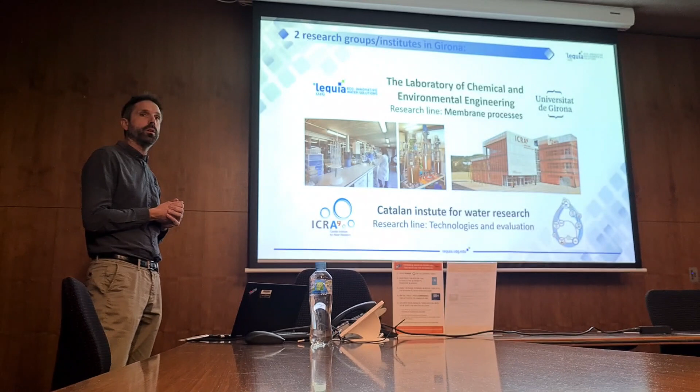Apart from this reason of water scarcity, Girona in Spain is one of the hubs for water research, let's say. I am currently working at LEQUIA, which is a research group of the University of Girona, and we are working closely with ICRA, the Catalan Institute for Water Research. These two research groups are quite strong, at least at the European level, and quite strong with regard to the size of the city, which is only 100,000 inhabitants, and we have a strong activity on water research.

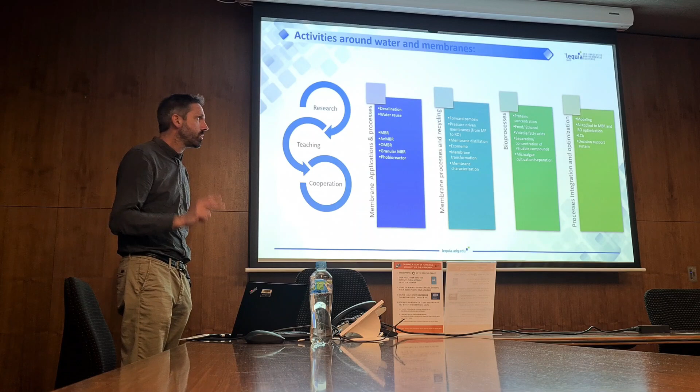And also, finally, we're working on integration, optimization of processes through artificial intelligence modeling, LCA, decision support systems. So more like a global approach.

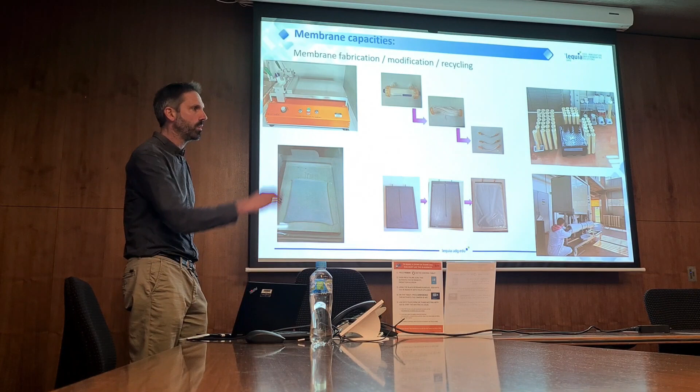In the lab, well, just very quickly, we start to have now possibilities for membrane fabrication, even if it's very basic, especially compared to what Ludo or you can do here at UTS. And we do membrane module modification to try to adapt commercial modules to our needs.

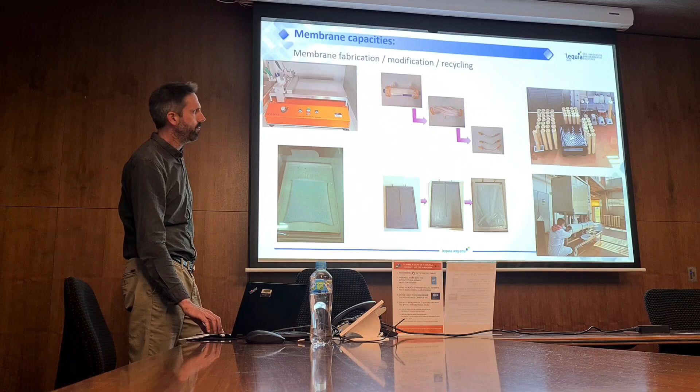And this is part of the equipment that Raquel has, for example, the spinner, for characterization of full-scale modules and cleaning as well. So we have all kinds, from small scale to, say, middle scale, close to industrial scale pilots. And we have the same for RO, so we can analyze from coupons, small modules to big ones.

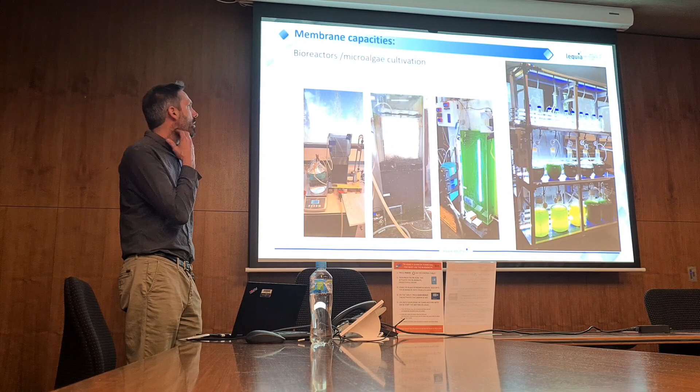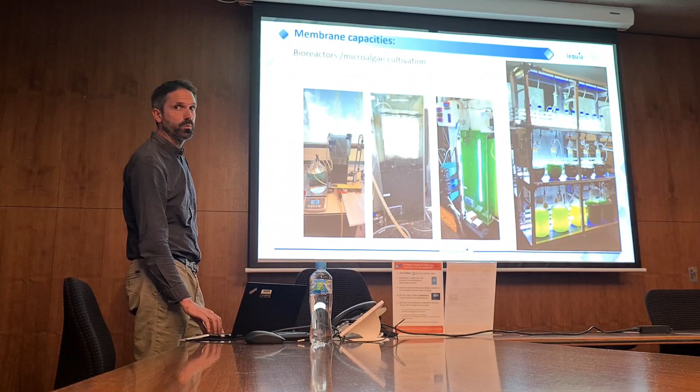And also now we're trying to work more and more on bioreactors, fermenters, microalgae cultivation, so we start to develop also this part of biological processes. This I wanted to mention because it's not a lot of money, but still it's quite a bit of time that we spend on that, and we like it a lot.

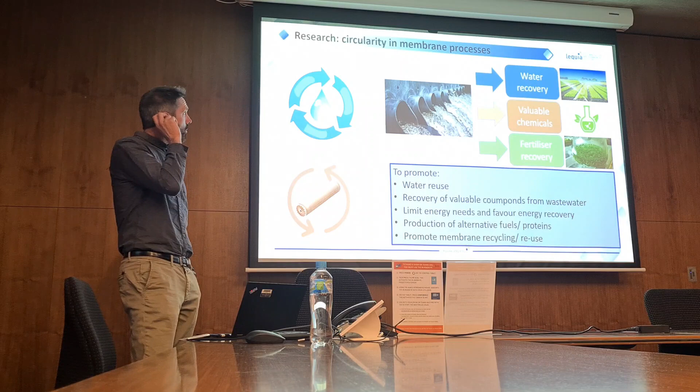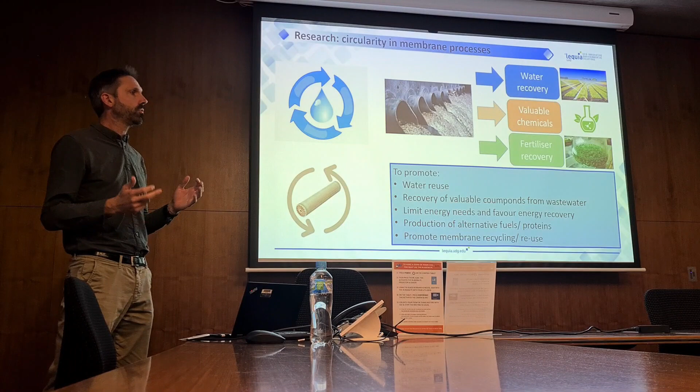And yeah, circularity, going on to the research part. So when we talk about circularity in membrane processes, we're not only thinking of wastewater treatment, but water recovery, trying to recover valuable minerals, which could be fertilizer, for example, as well.

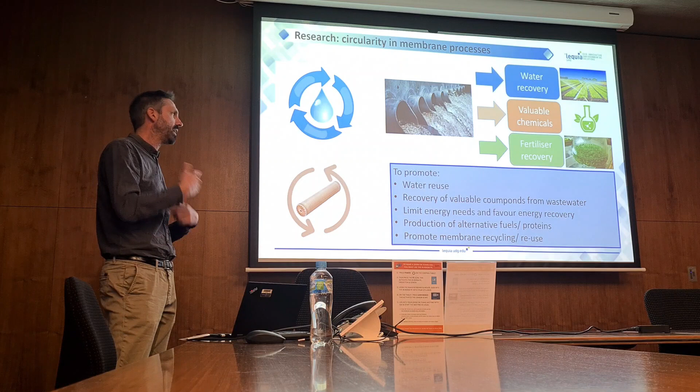So we try to work on projects which are promoting water reuse, recovery of valuable compounds, trying to limit energy needs for those processes, or even to produce energy, production of alternative fuels, proteins, and also through some projects, we have tried to promote membrane circularity, so the recycling or reuse of membranes. So there are several projects that I will go through now during my presentation that I'm involved in.

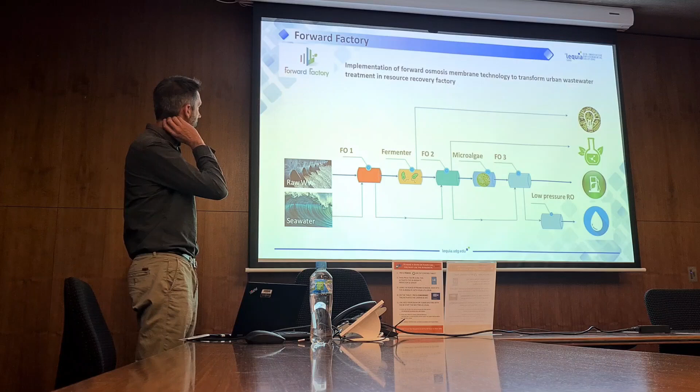So far we're dealing with different aspects of that. The first one is actually my main research grant, which is called Forward Factory. So working with forward osmosis, which is still my main activity. So to try to make use of the osmotic power from the seawater to extract the maximum of water from the wastewater, at low pressure, to have a diluted seawater that you can reuse for whatever water usage, depending on the legal aspect.

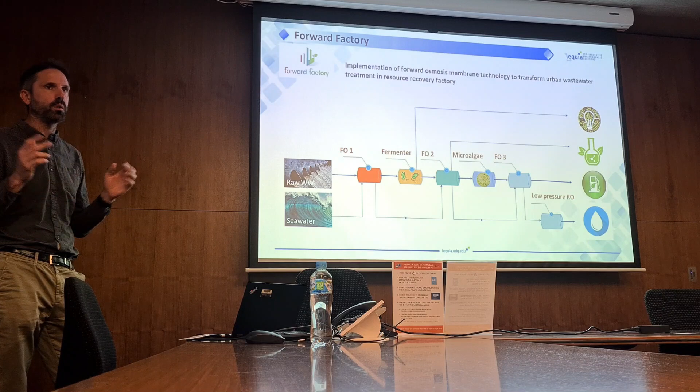And at the same time to concentrate wastewater, because one of the limitations of valorizing wastewater is the high dilution in water of all the valuable compounds. So trying to harvest the water, concentrate the streams, and then to have more potential for valorizing those compounds, to treat them especially through biological processes.

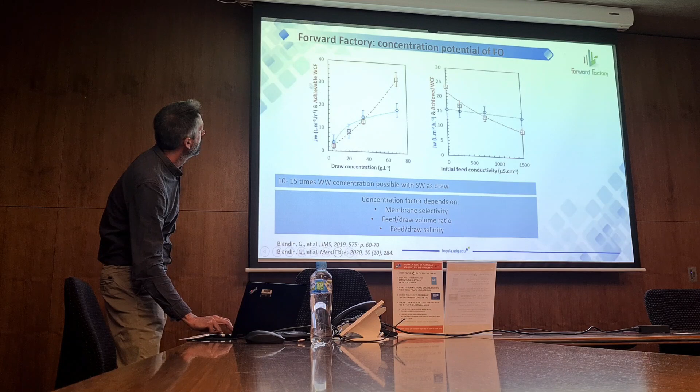There are many aspects that we are dealing with in this project, but one of the questions was, how much can we concentrate? So we're still working on that, trying to refine the model. But basically, if you think of using seawater at 30 grams per liter, you can easily achieve like 10, 15 times concentration. Then it depends, of course, on the salinity of the feed water, of the wastewater, on the arrangement and so on of the forward osmosis system, but just to give a rough number. So there is quite some potential to extract a fair amount of water from wastewater thanks to the seawater.

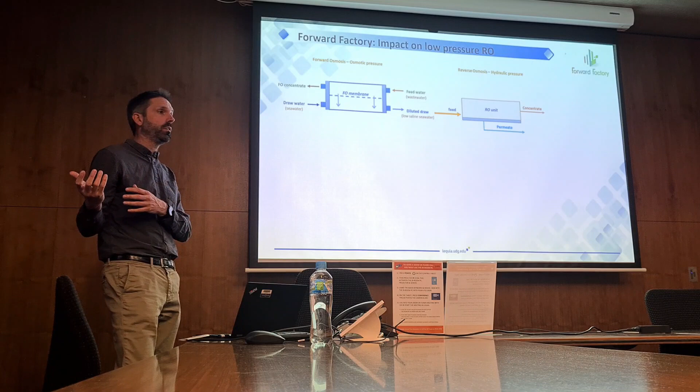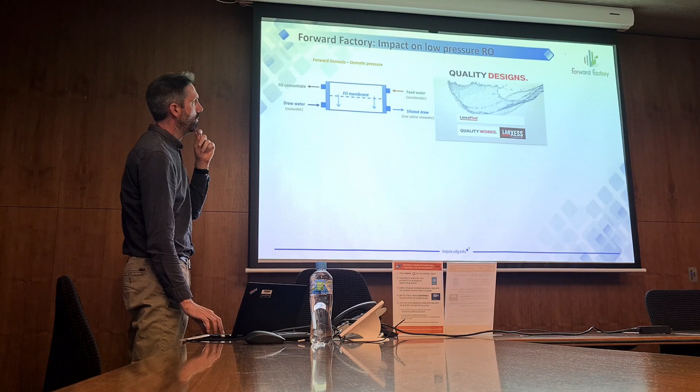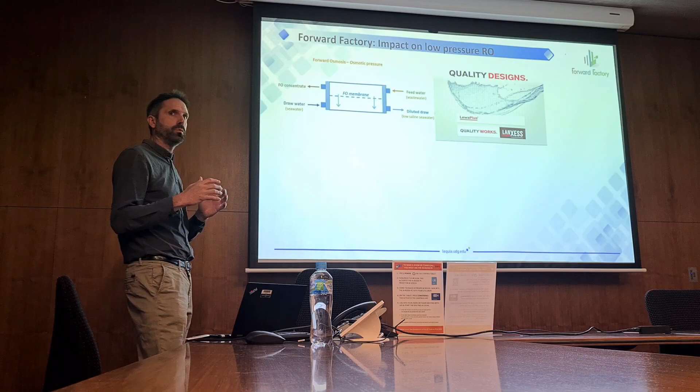And another question we had is, okay, what if we dilute seawater? What will be the benefit in terms of energy and water quality from the permeate of the reverse osmosis? So I have a PhD student who started working on that; she compared different design systems from membrane manufacturers to try to have some idea of what could be realistic in terms of achievable objectives. And what would be the interest of diluting? If it really makes sense, and until when can we go, basically?

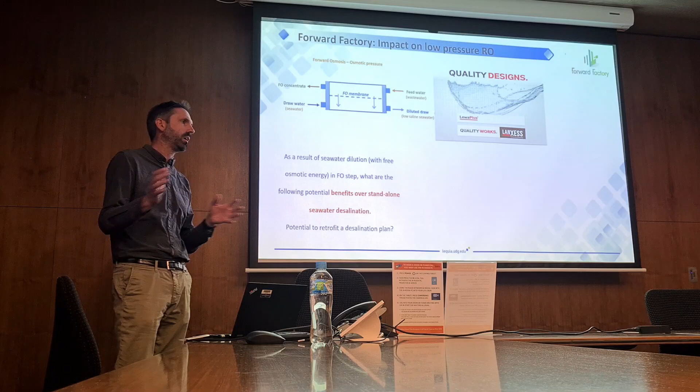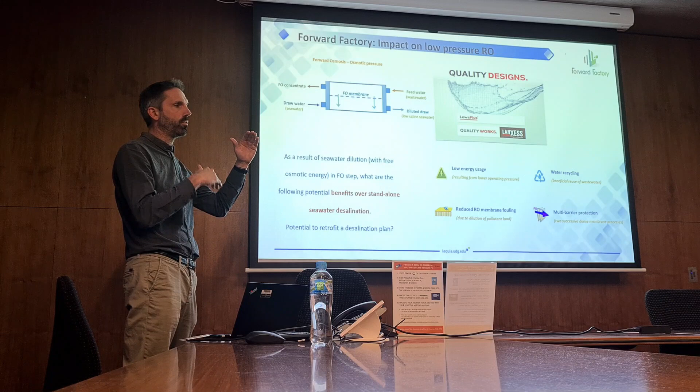And one of the questions we had is, if we already have a desalination plant operating, is it possible to dilute the stream? Will the desal plant still be functional, or is it nonsense and we better start with a new desal plant? That kind of question we try to solve. In theory, this is the main interest you can have: low energy usage because you dilute with wastewater, you have your water recycling, you have reduced RO fouling, and also multi-barrier protection from the wastewater because you have FO and RO membranes, so a double dense barrier, to have a very high rejection of all organic microcontaminants.

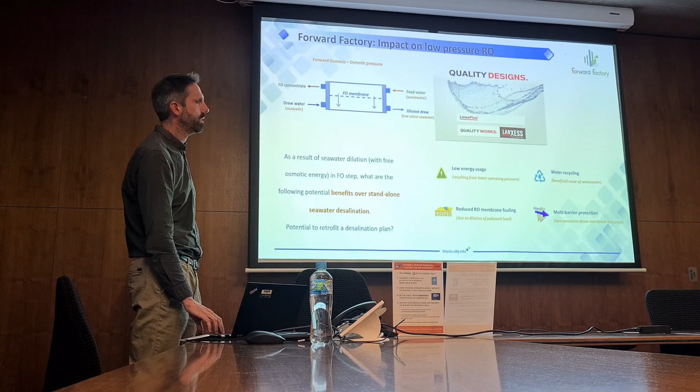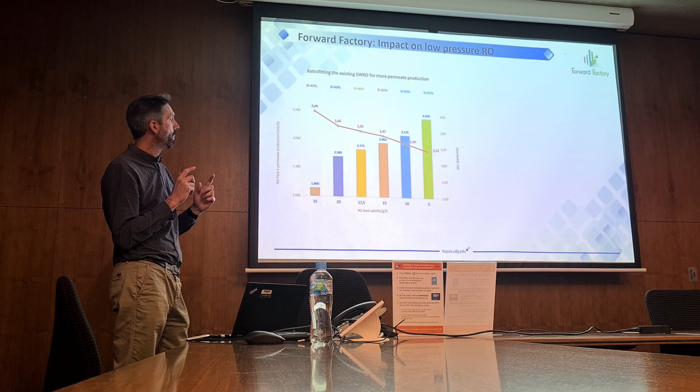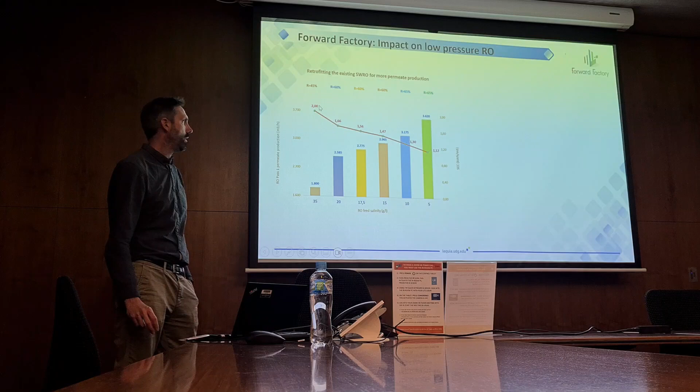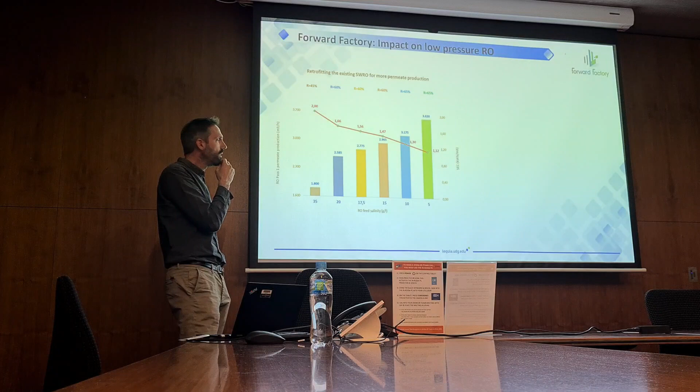So, well, she did a lot of calculations, but this is one to try to sum up. So we started with a design of a typical desal plant where you can produce 1,800 cubic meters per day of permeate. And if we have 45% recovery using seawater as feed, it will consume around 2 kilowatt-hours per cubic meter to produce water. This is what comes from the software. If you look at all the software, they come to the same results as soon as you have an energy recovery device, depending a bit on the design you choose. But that was our starting point. And then we started to check the impact of dilution.

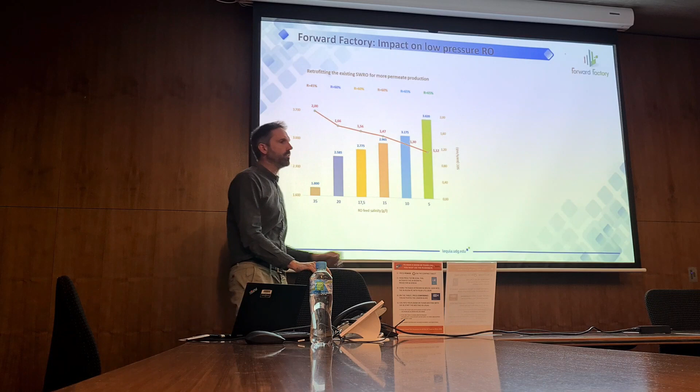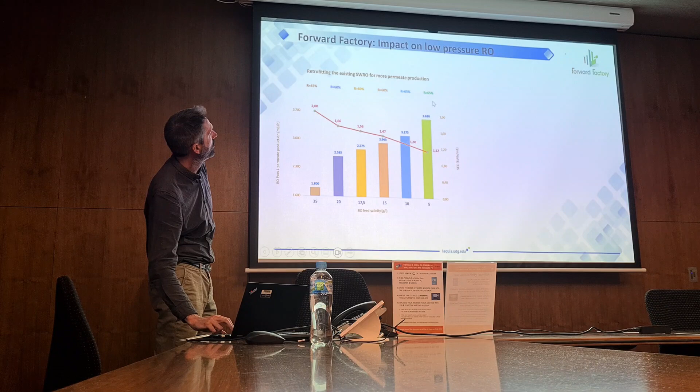So if we dilute, what happens? What are the potentials? So here, for example, you can increase the recovery of the unit, up to 60%. These values basically are when we reach the alarms in the system. So the design software was starting to tell us that this is going to be an alarm because there is too much permeate, there is too low concentrate, that kind of alarms.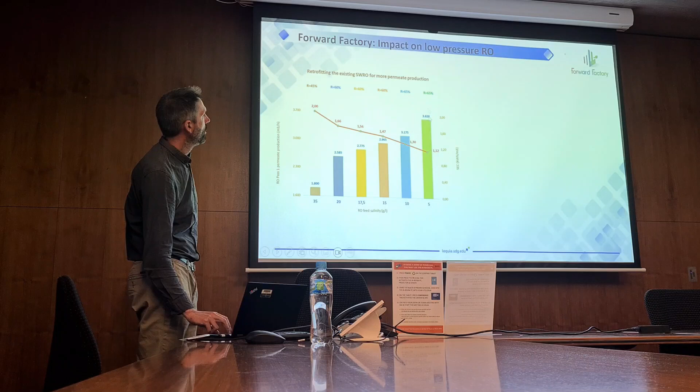So what we saw is that 5 grams per liter is very ambitious, but in this case you can, for example, increase the recovery to 65%, produce 2 times more water than the initial state, and have an energy consumption which is more or less half of what would be a desalination. So some potential here to produce more water, to reduce energy, thanks to this system.

What we saw also is that there could be an interest in boron rejection, well, to reach lower boron limit. That is actually a problem in the desal plant, that they normally put a second pass sometimes because they cannot reach the boron limits, which increases a lot the energy requirements. Also, we had relatively low TDS, but still within the specs.

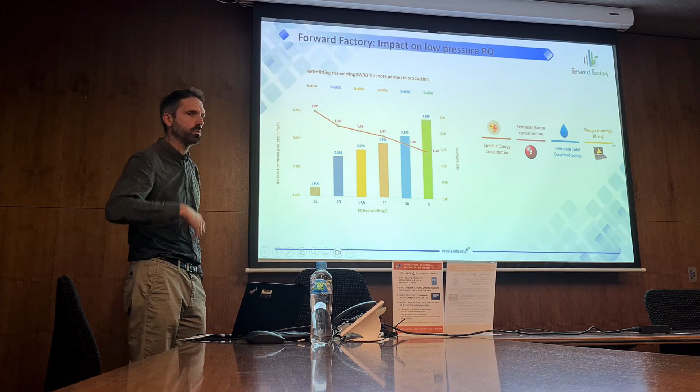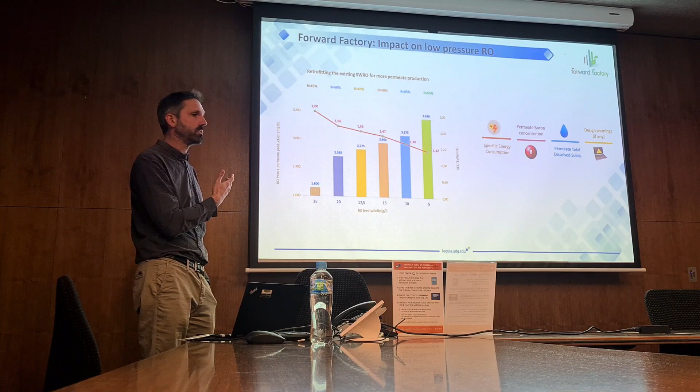So we still want to work and talk to industry to see, well, what the software gave us, is it relevant in terms of industrial design? Because it's important to know if what we show through these softwares is really relevant at full-scale design of the plant.

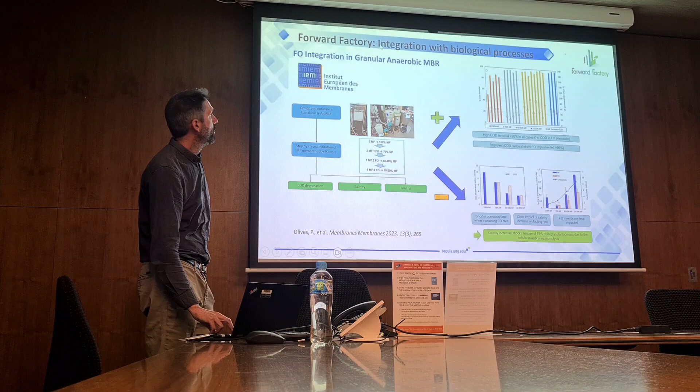Another approach that we went through in the forward factory project is how we could integrate forward osmosis with biological processes. So it's just an example that in this case we worked with IEM from Montpellier, where they had a project on the granular anaerobic membrane bioreactor. If we can couple the system with forward osmosis, what would be the benefits, limitations of the system?

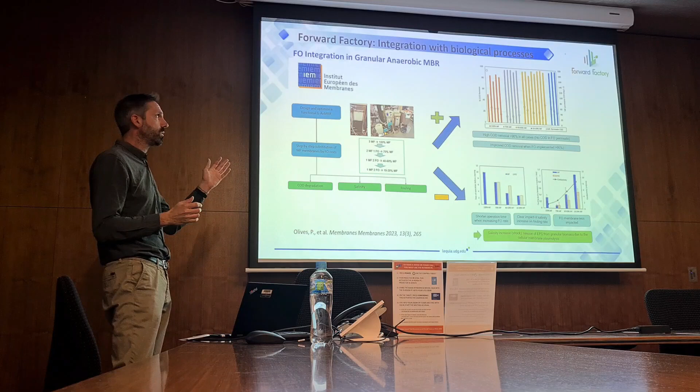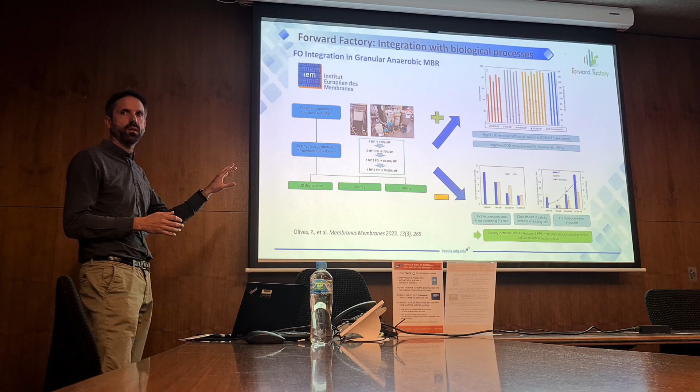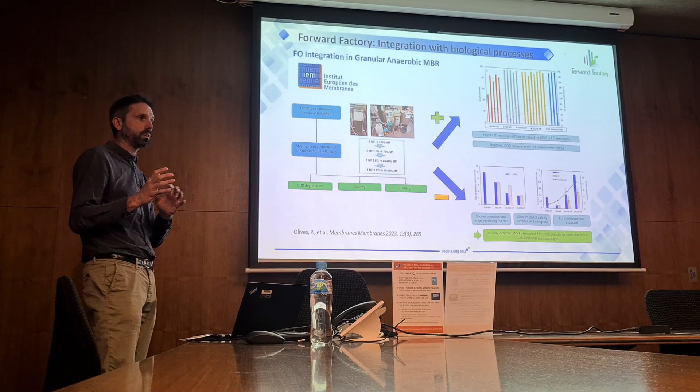So here we saw that we could increase the COD removal above 90% when we implemented some micromembrane system. We have some limitation of salinity increase, so probably it's not the best design, but we are working around different concepts to have a clear idea of how it would be most relevant to integrate FO concentration, or even compare with other membrane technology to see if it would make sense, basically.

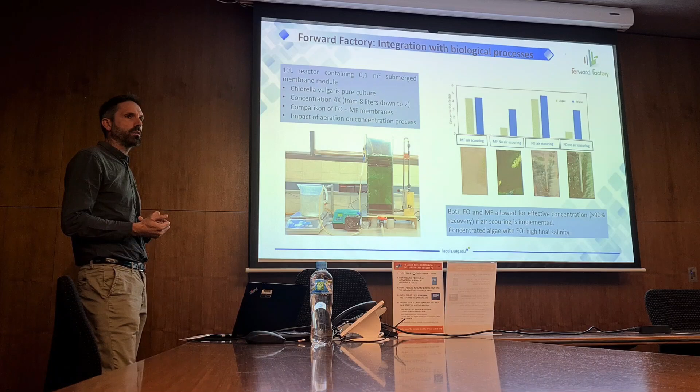This is another test we did. We're working on one side on microalgae production and optimization, and on the other side on the microalgae concentration. So we're trying to see, through submerged systems, for example, what are the optimized conditions to have efficient microalgae concentration. I don't know if you're aware of that, but concentration of microalgae is one of the limitations of the development of microalgae, because they are very, very diluted. And then it takes a lot of energy to concentrate and extract them. So if we could work on the efficient concentration of microalgae, that's also of interest.

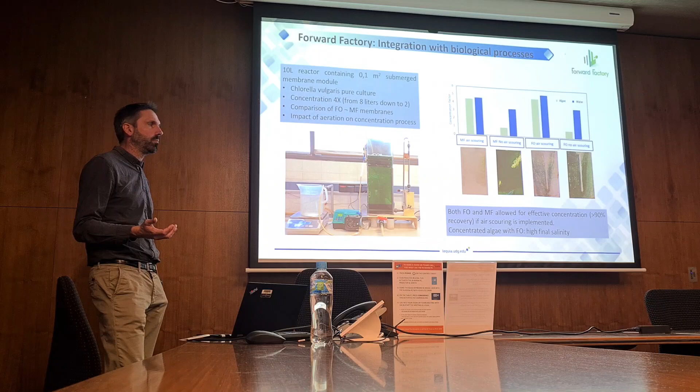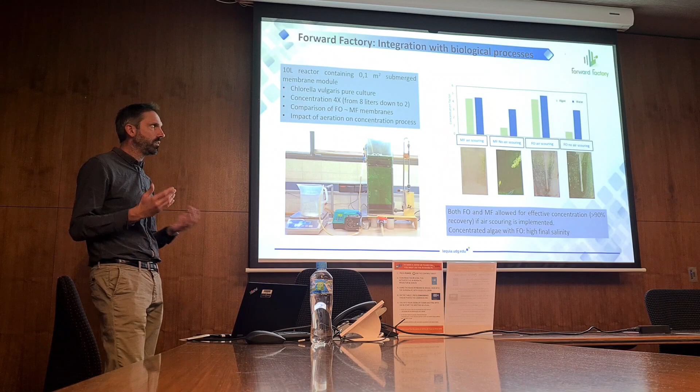What we saw, well, it's not fully surprising, but when you have air scouring of your submerged membrane, you have very low fouling, and then you can concentrate your microalgae efficiently. We compared microfiltration and forward osmosis, leading to the same concentration, similar flux and operation. The difference is that with forward osmosis, we had a high rejection of all compounds, not only microalgae.

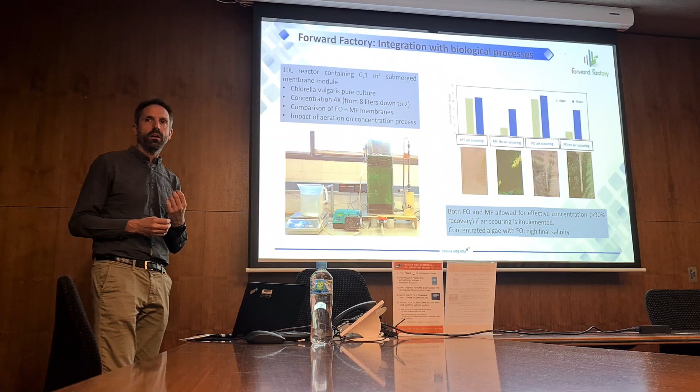So we had microalgae concentrate. On one side, we have pure permeate, but on the microalgae side, you concentrate all the other compounds you had initially, and also a bit of reverse salt diffusion. That would lead to a very saline microalgae batch, basically.

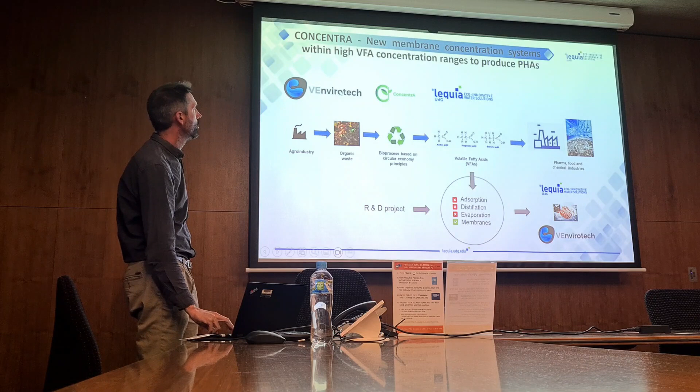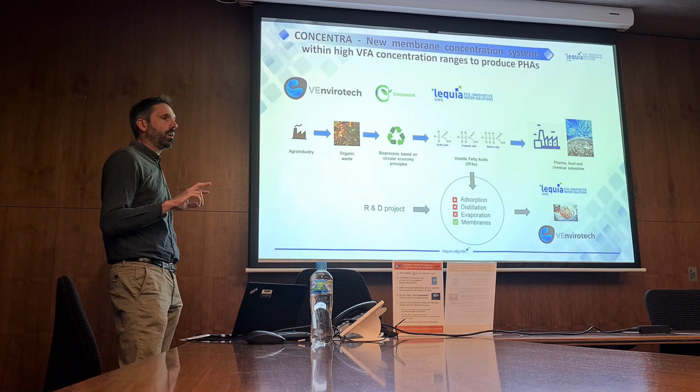Another project, we're working on this through an industrial doctorate and funding from the Catalan government. We're working with this biotech startup, whose aim is to take organic waste, mostly liquid waste like wastewater coming from the agro-food industry, transform it through fermentation into volatile fatty acids, and then do the purification to produce most likely PHA, so a bioplastic.

And one of the critical steps in the process was that, depending on the type of waste, the concentration of volatile fatty acids that they produce from the fermenter is maybe around 2 to 5 grams per liter, and ideally they would need 50 for the optimization of the PHA production.

So we're working on that and trying to see how through different membrane processes we could concentrate, and potentially purify, those VFA. We are still in the project, so still at lab scale, comparing FO, RO, and NF as well. What we see, of course, is that depending on the pH of the batch, you have different rejection mechanisms through the membrane.

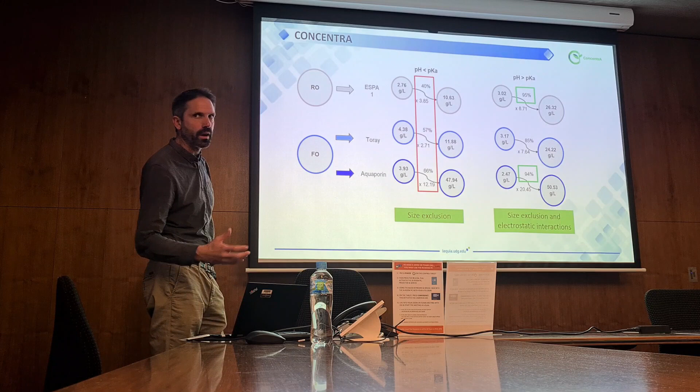Basically, more or less, RO and FO will act the same in terms of rejection. But in that case, for example, when we have a pH above the pKa, so you have size exclusion and electrostatic interaction, we manage to concentrate 20 times our volatile fatty acid. So 50 grams, which is our initial target, is possible. And it's also a very high recovery, so we don't lose those volatile fatty acids through the membrane.

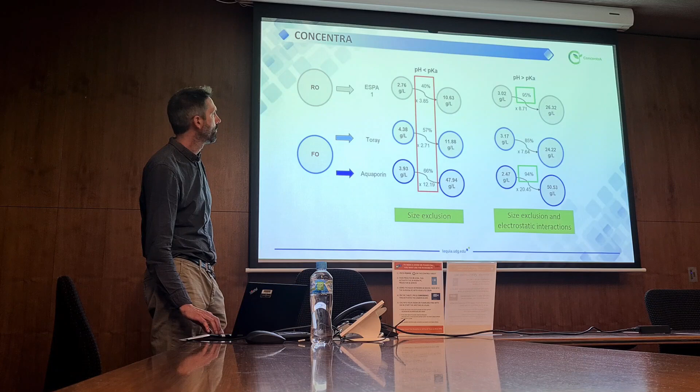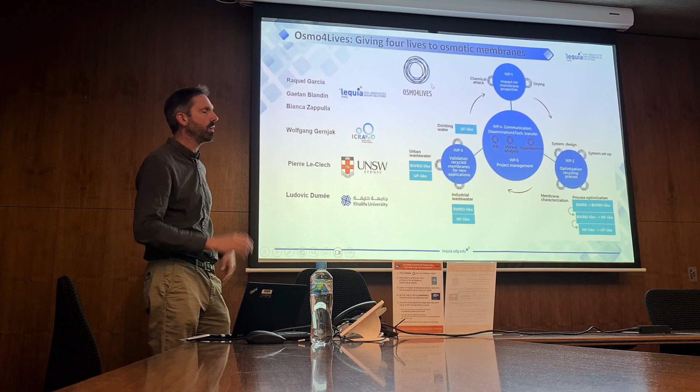Another project is more about membrane recycling, where we work together with people from ICRA, with Pierre Le-Clech from UNSW, one of the reasons I'm here as well, and with Ludo. We have this project Osmo4Lives, which aims to give a new life to a reverse osmosis membrane. The idea is that from a seawater reverse osmosis membrane that is about to be discarded, we can transform it to brackish water, then to NF and UF membranes, and try them in all those applications.

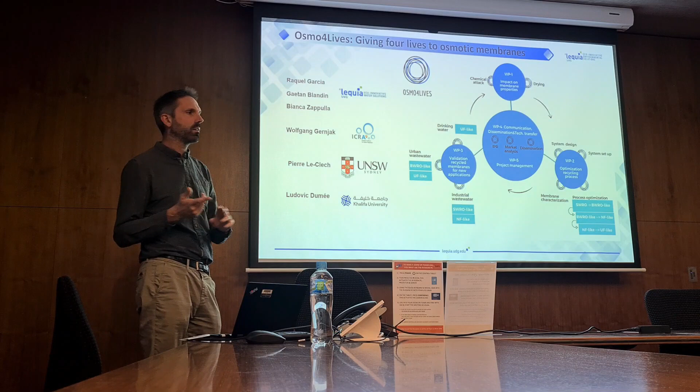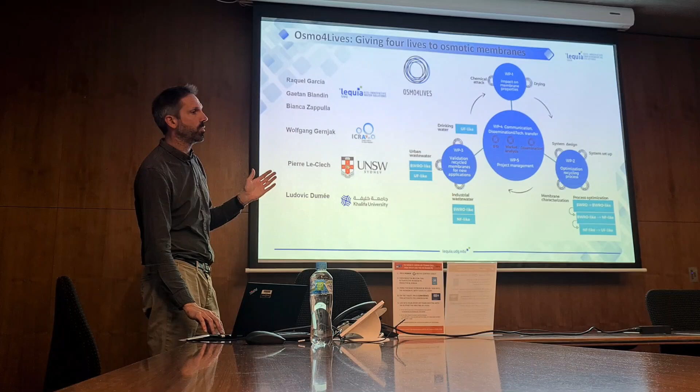Through this project, we are working on several aspects, not only trying to degrade those membranes, but also trying to understand the consequences of wrong management of the membrane, and how drying, chemical attack and oxidation will affect membrane properties. We try to optimize the process in case we want to recycle, change or transform the properties of the membrane, at lab scale and going through pilot scale, and also test those membranes in real scale application.

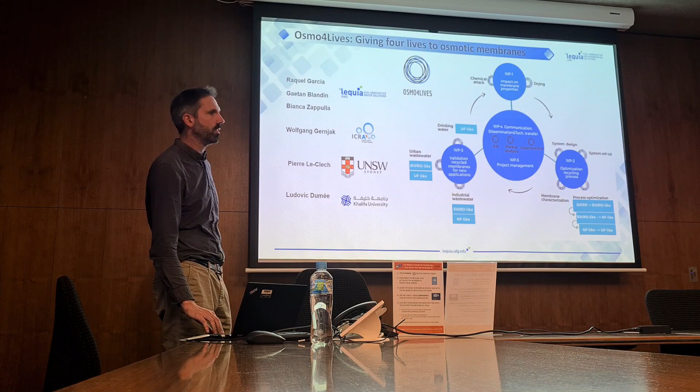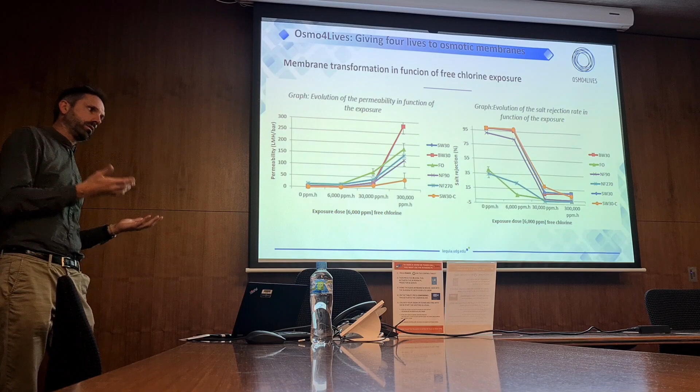This graph explains, for example, when the seawater reverse osmosis membrane was in contact with chlorine, depending on the contact time, you can increase the permeability and decrease the selectivity, mainly because you attack the polyamide layer. You're degrading your polyamide, the membrane is getting more porous, loses its rejection, but increases its permeability. So depending on the level of attack, you can change the membrane into an NF or UF membrane, for example.

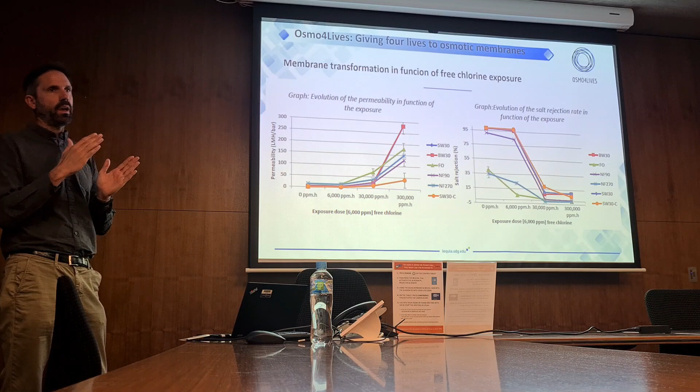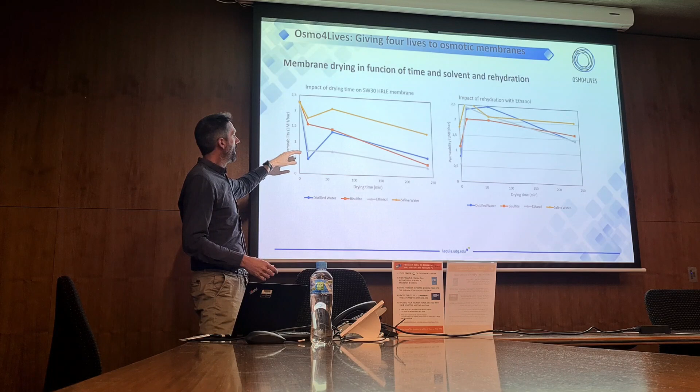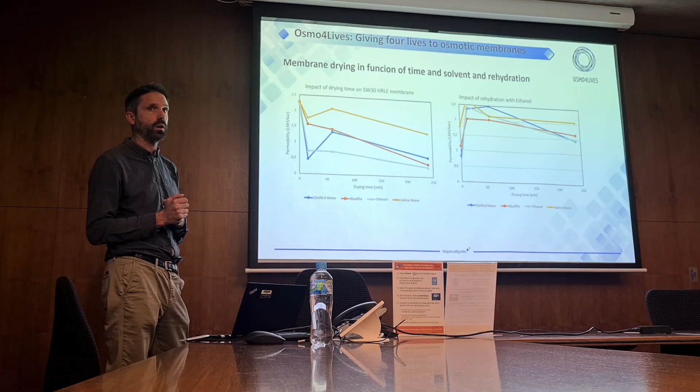This other one is about drying. What we saw is that if you let the membrane dry, you will also lose permeability. And depending on the solvent you use, you can lose the initial properties of the membrane. So drying could also be a strong limitation to membrane recycling, depending on how they were stored.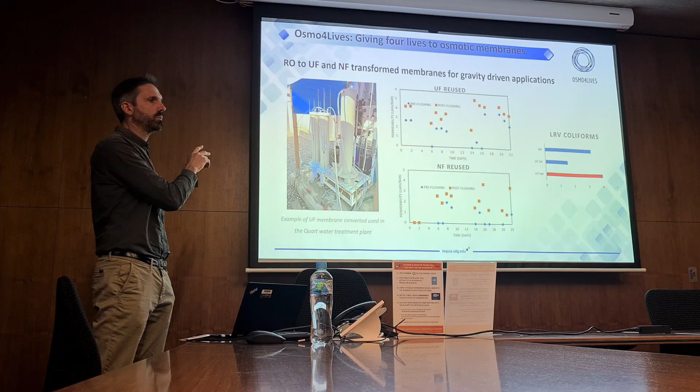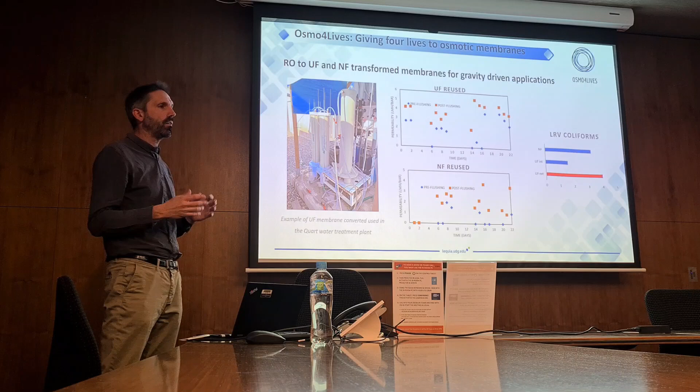And that's an example of a reused module. In this case, it's tertiary treatment of wastewater at the wastewater treatment plant close to our research center, where old seawater reverse osmosis modules have been transformed to UF or NF, and we try to see if they can work in a gravity-driven application as a polishing step of tertiary treatment.

We saw that we still have to go every day to clean the module a bit, but we have had operation now for above two weeks, I think, where we can produce pretty good quality permeate. We especially looked at removal of coliforms, where, depending on the membrane and the configuration, we can reach log 3, log 4 removal of those pathogens.

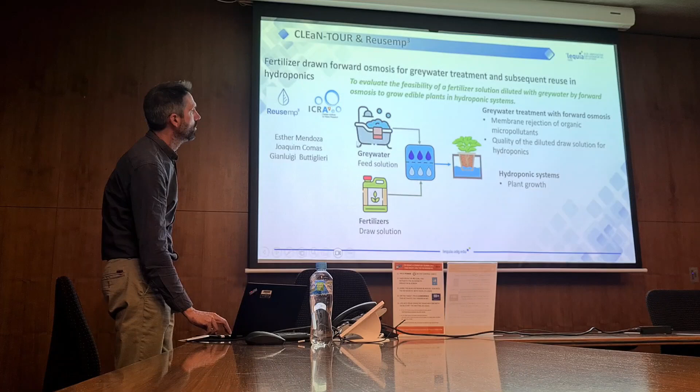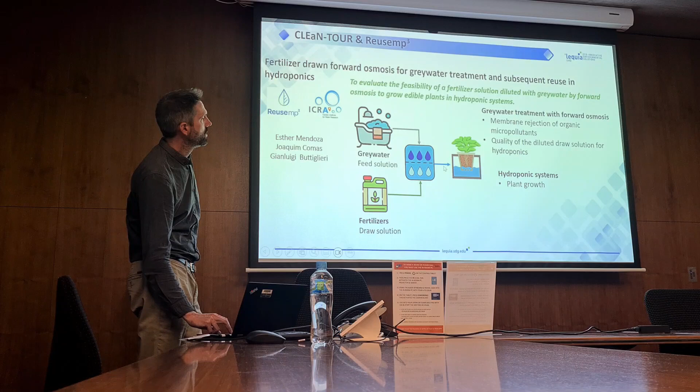Another one is connected to the research developed here at UTS on FDFO, fertilizer drawn forward osmosis, which uses a fertilizer with high osmotic pressure diluted with wastewater. In our case, we are focused on greywater, and the idea was to implement it in a hotel where all the greywater can be collected and used to dilute fertilizer solution. The challenge is that this diluted fertilizer could be used in a hydroponic system.

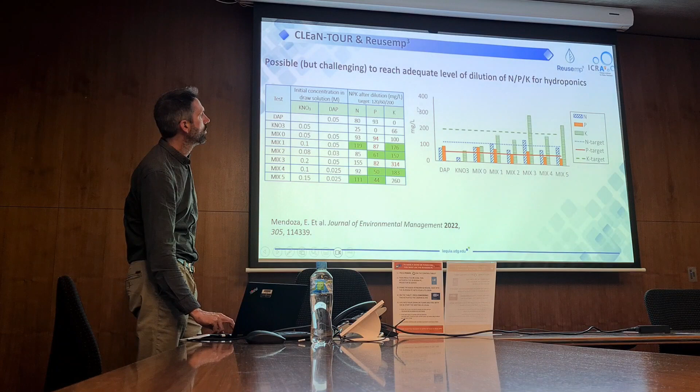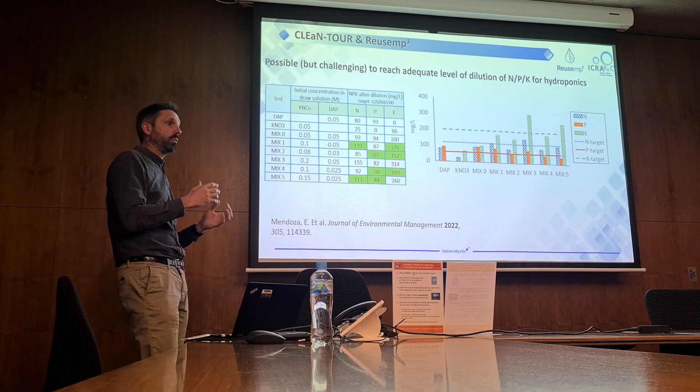One of the limitations of this process is whether we can dilute down to what is required for the plant, which was one of the research questions they had here as well. In some cases, when you play around with the type of fertilizer, you can reach something close to the requirements, but it's still very challenging, especially depending on the type of wastewater, its conductivity, and the level of dilution you can reach, because you have to extract a lot of water from the greywater with a small amount of fertilizer.

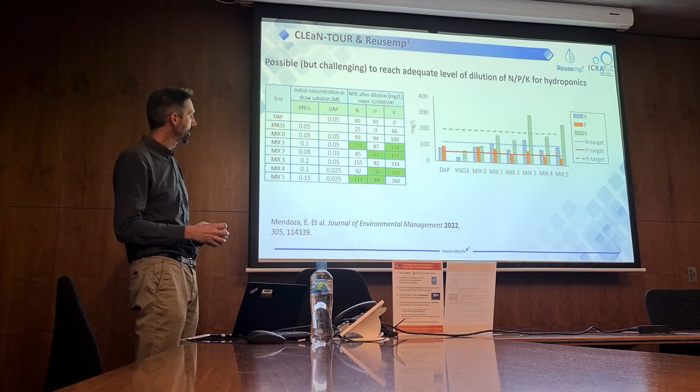But we managed to get to some levels that were acceptable to be tested on plants, let's say. So yeah, the research was mainly conducted from ICRA, where you have hydroponics lanes and you can compare different types of fertilizers with different types of wastewater, doped eventually with some micropollutants, and check later on the development of the plants. So on one side, we observed that there was a decent development of the plants, not as good as if clean water was used, just mixed with fertilizer, but pretty decent growth.

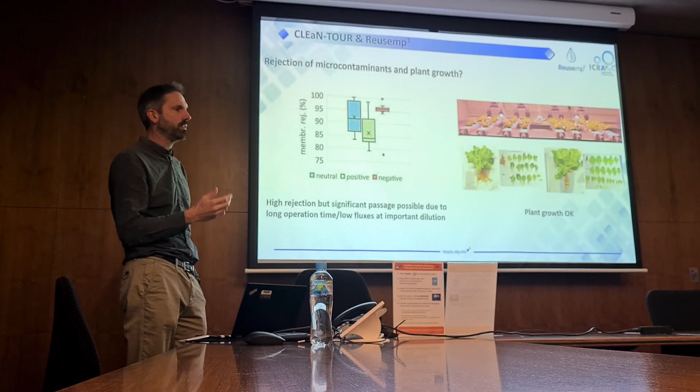And also one of the interests that we tried to evaluate in this case is the rejection of micropollutants from the grey water, which was very high. So this is also one of the interests of this configuration, that you can reject a lot of microcontaminants for direct reuse.

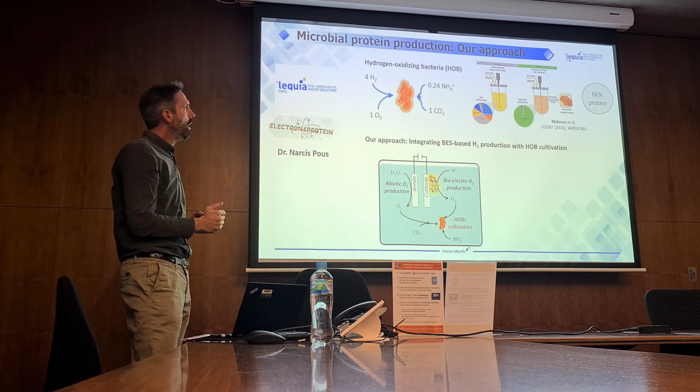Another topic we've been working on is with our colleague Narcis Pous, who is working on the production of proteins based on bioelectrochemical systems and urea or any source of ammonium. So his research is really more on finding the good biological source, and also trying to optimize the system. But basically, they are producing what we call HOB, those bacteria which are full of proteins. And the idea is that these bacteria later on could be used, for example, as feed for fisheries. So now they have a process that is quite stabilized and starting to produce quite a lot of quantity.

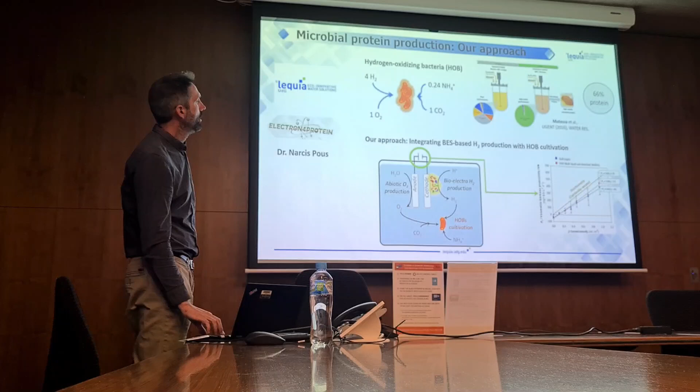And basically, then we talked and they said, well, I need to concentrate. So how can we do that? So we did some tests to see, by different types of membrane technology, if we could extract the water but also concentrate the proteins, which is not the only project or topic in which we're working on that. You have to extract the water, so to concentrate your feed water, but also you have to concentrate your products. So be sure it's not going through the membrane, be sure it's not fouling the membrane and lost. So there is all this approach on how effective is the concentration and how far can you go.

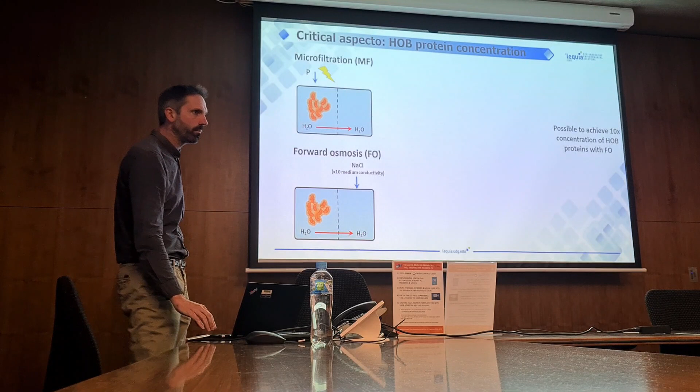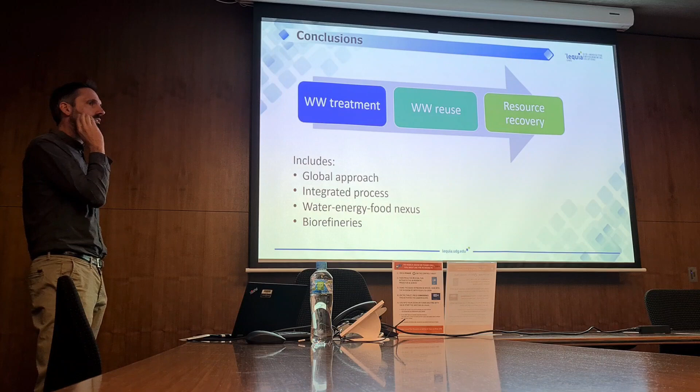And well, conclusion, just to repeat a bit the approach we have in LEQUIA, but I think it's probably a general approach all over the world now, especially in the European area where a lot of funding is coming from the EU, and all the national plans are connected to the general view of the EU as well, is moving from wastewater treatment to resource recovery on one side, so trying to get more valuable components from any waste, but also having a global approach, integrated processes.

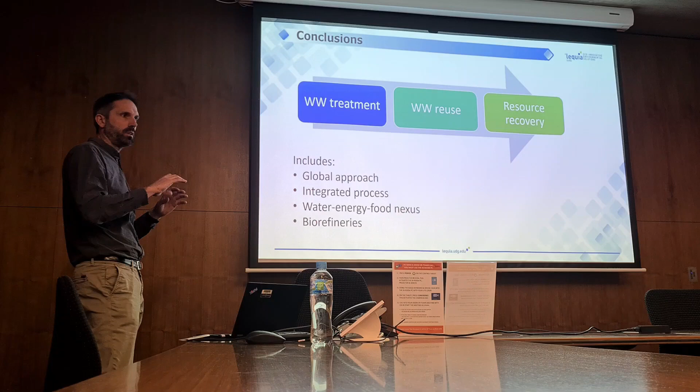Most of the projects now are integrating social aspects. They're integrating overall environmental evaluation. They want also projects which are integrating water, energy, and food. So most of the research projects are not focused on one specific technology development. They are more integrated in a much broader scope.